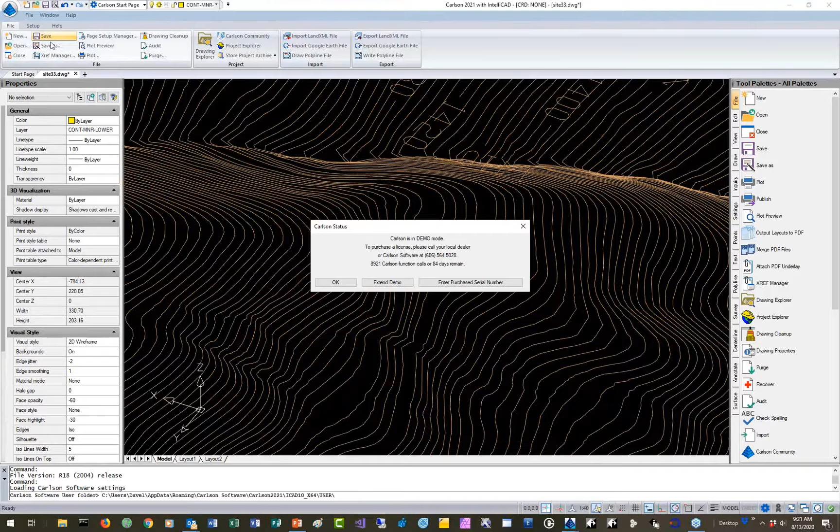I'm just going to open up a drawing file here. And what I want to start off with first is just kind of go through the user interface a little bit so you can see what this looks like and sort of compare it a little bit to AutoCAD.

One of the first things you'll notice when I bring this up is that with Carlson 2021, it has all of these Carlson solutions that are in here. So it has survey, civil, hydrology, GIS. So there's all these different solutions that Carlson actually has running on top of IntelliCAD.

But I just want to kind of cover the basics. So what I'm going to do is I'm just going to flip this over and just go to the basic Carlson menus, which is the typical kind of IntelliCAD menu system, so we can sort of look at the basics as a comparison to generic AutoCAD.

So let's take a look at the user interface here and you'll see. We have very similar things that you're used to seeing. You've got your app menu and you can look at some of the things that we can import, STL, IGES, DXF files, DGN, OBJs, different types of file formats that we can export. We have a lot of different things that we can attach.

If you're interested in attaching images, you may think, well, do they have enough image types there? We have a few image types that we support. I don't know how many that is.

We've got also the tools that you need for publishing your drawing files, drawing utilities like audit, recover, purge, overkill, and support for digital signatures, your typical options that you've got.

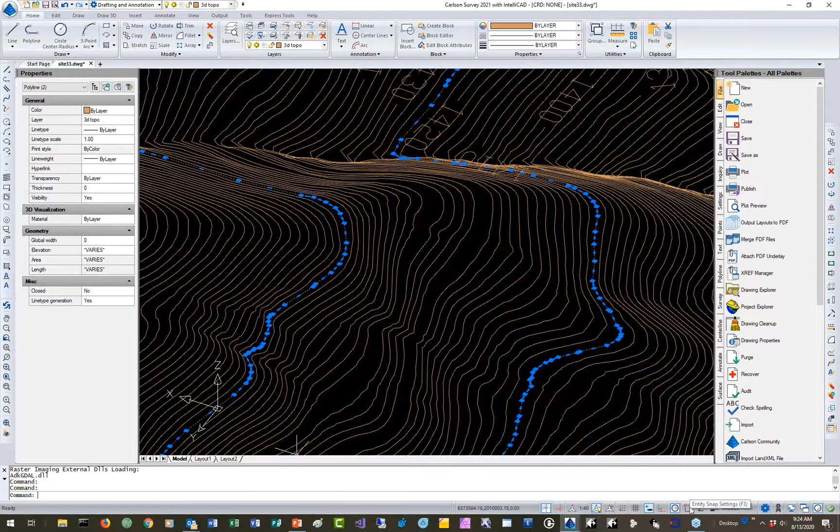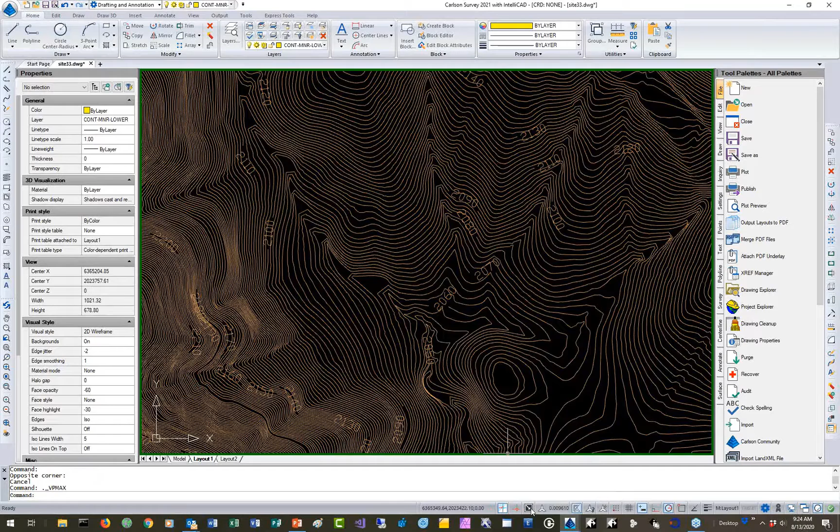And of course, if you're working with AutoCAD, you're working in paper space and model space, and you want to make sure that, oh gosh, does it support annotation scales? Got to have those. What about, can I maximize and minimize my viewport? Yeah, sure, no problem.

So pretty much the user interface is what you're going to get, is what you would see in AutoCAD. So you're wondering, well, what's the format for this user interface, and can I customize it? Yes, this is just a standard CUI file that you can customize like you can in AutoCAD.

We can bring up our CUI customization, and you can see all that. It's a little slow here because Carlson has so many different solutions and stuff in here that it brings up. But you can see in here where you can customize all these different areas of the product, the menus, the toolbar, the ribbon, the contextual ribbon states, quick access toolbar, shortcuts, aliases, double-click actions, what'll happen when you double-click on an entity.

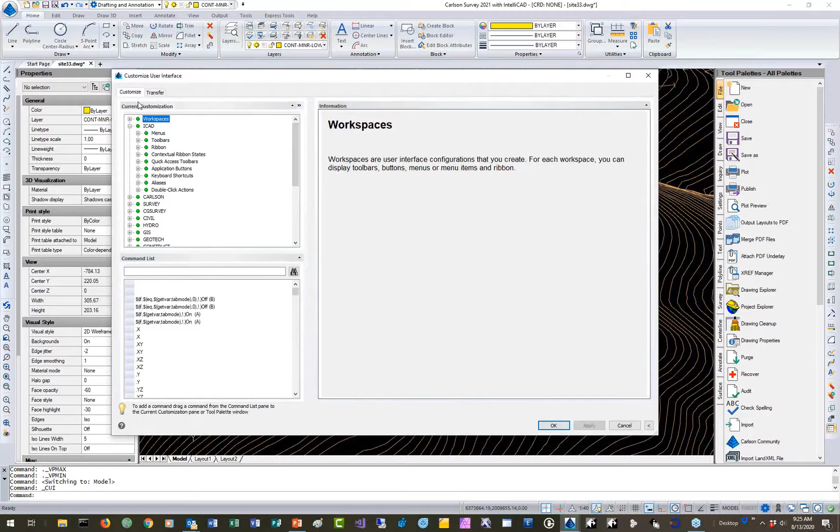It's all here. You can transfer stuff from other CUI files into IntelliCAD, or you can modify things here, and you can also merge things. There's a new merge feature now. I know some of you have used IntelliCAD before and had problems merging your CUI, maybe you've customized your older Carlson product and wanted to bring that in. You can do that.

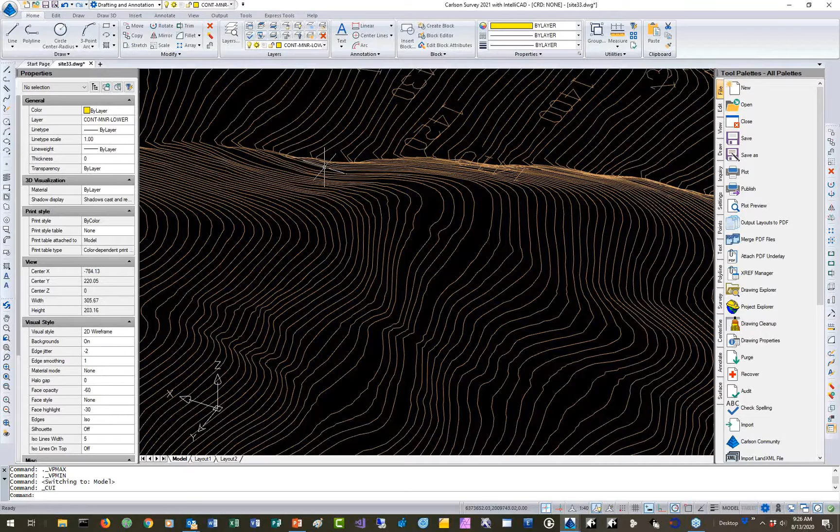I'm going to go back to the start page and bring up an empty file. I'm just going to scribble a little bit, not actually draw anything real, just to show you drawing some stuff in IntelliCAD.

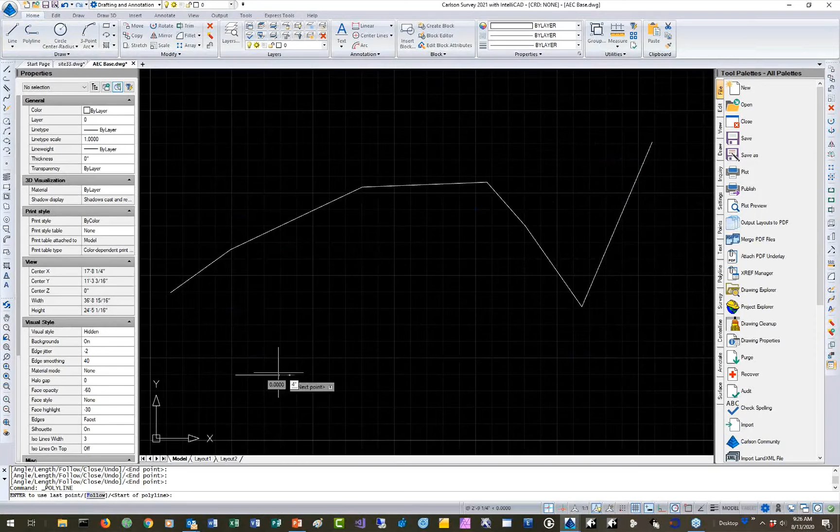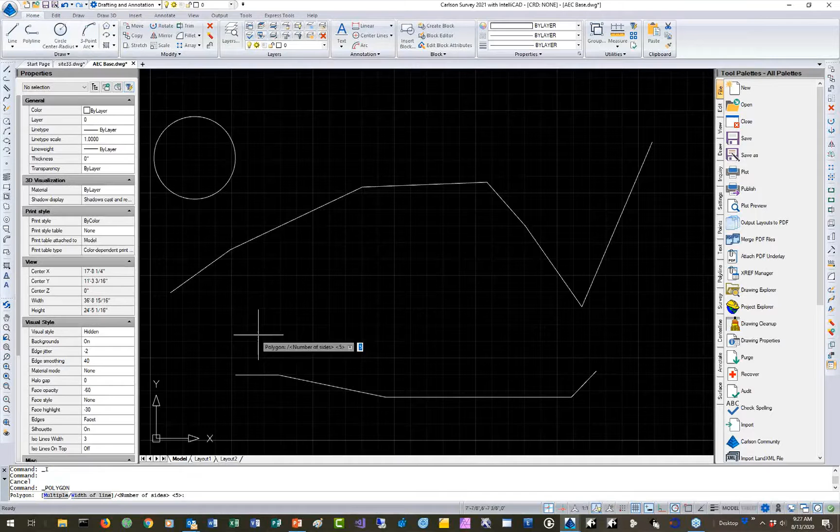This all looks familiar. You can see my dynamic input working here. I'm going to draw some lines and a polyline, and a circle. Let's do a polygon and make this 5 sides. Whoops, I just screwed that up. Let's try that again. Polygon, and our sides, I want 5. There we go, I just didn't pick my point. Now I'm going to draw something else.

Let's go in and show you a break line, because that's kind of cool.

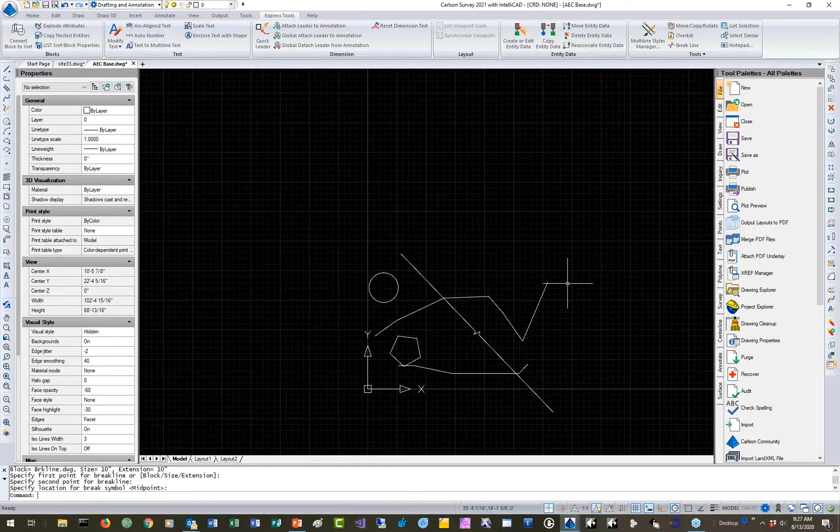So these are just standard AutoCAD entities. You can see from our draw menu we've got all these different types of entities you're familiar with, all the classic line, circle, arcs. I should maybe add some text too, so you've got something. You can see some M text go in. Just going to draw some text here. And something else that's kind of cool, the contextual menus. You can see we've got contextual menus for objects as well.

That looks familiar, but I wanted to show a couple things where IntelliCAD's a little bit different. For example, with this polygon, there are some additional grips. In AutoCAD, when you select a polygon, all you really get are these corner grips, and it's not really a polygon, it's just a closed polyline. Here it's a polyline just like in AutoCAD, but notice you have these additional properties. I can change the number of sides, I can change the inscribed radius or the circumscribed radius. It actually knows that this is an actual polygon.

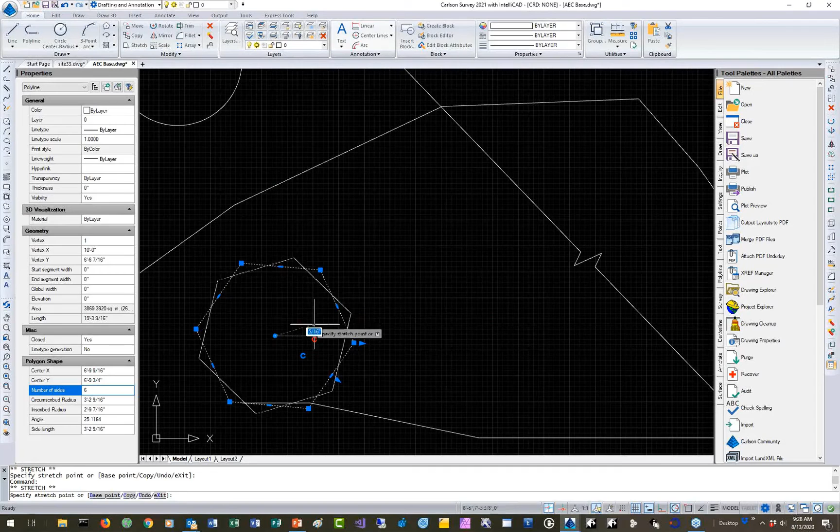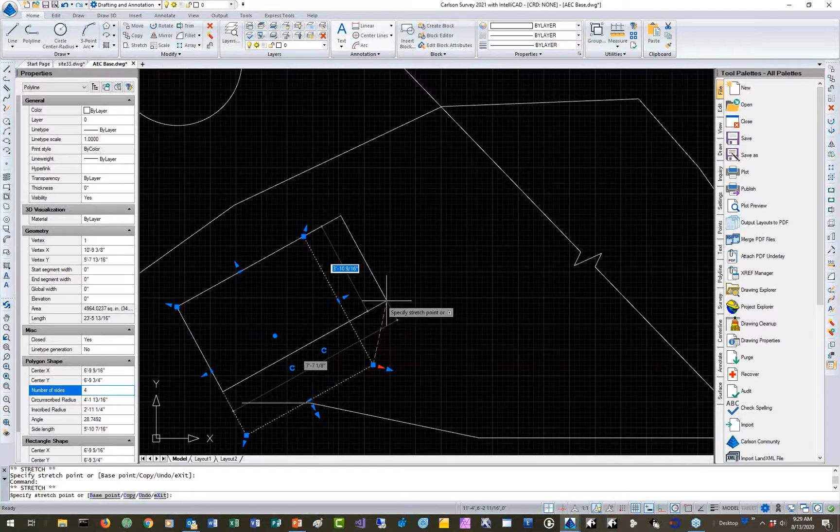Here I can stretch it using some additional grips that are available, and I can rotate it. It's just a bit smarter of a polygon. In fact, let's change this now to a square. So now we even have different grips. We have grips we can drag to keep this remaining a square, or if I take this one, I can turn it into a rectangle. It's just a little bit smarter than your average AutoCAD rectangle or polygon.

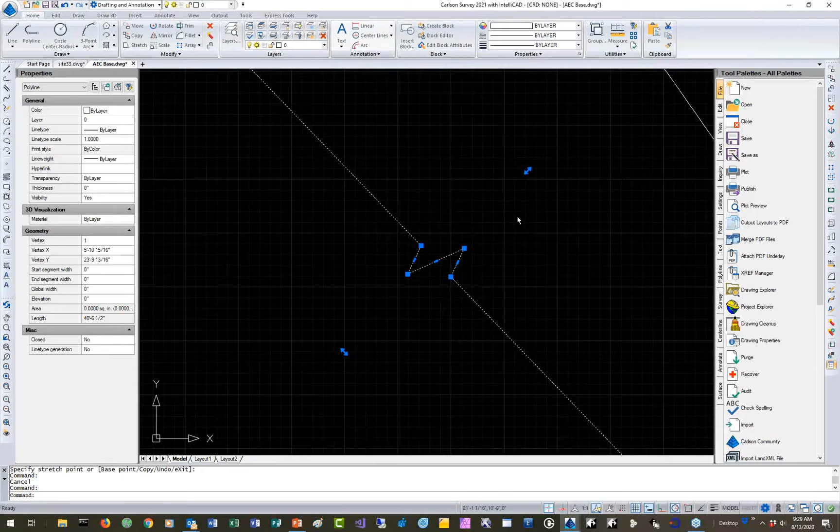I also want to show similar functionality with the break line, because if you ever draw with the AutoCAD break line, you know how dumb it is, and it always drives you crazy trying to make it work. But here with IntelliCAD, we have additional grips on this, and you'll notice it is really just a polyline, not a custom object or anything like that. Because of the way we draw it and look at it, we can actually tell what type of object it is, and so we can do some special things with it.

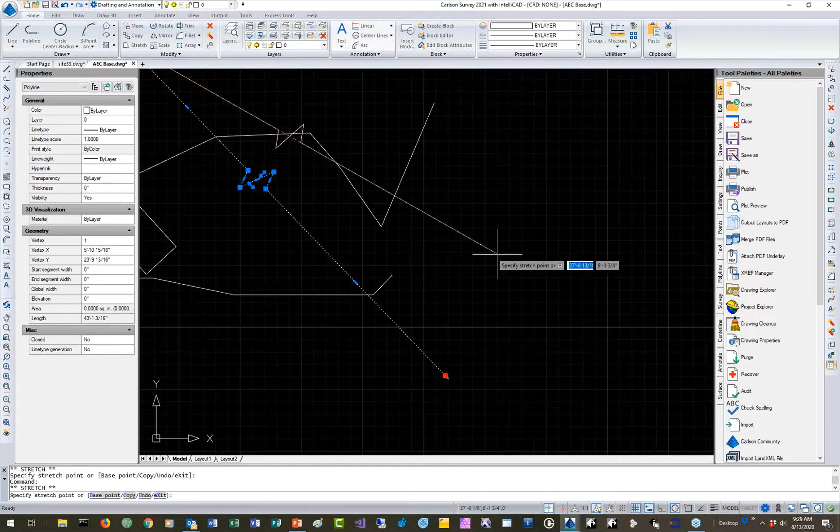Notice here, normally if you're in AutoCAD and you grab this, it doesn't rotate around like that. But notice here, if I use these other smart grips, I can get it to move the way that I want as a grip for the break line. But if I grab one of these other grip points individually, now I've just broken it. It's no longer a break line anymore, it is just a polyline. And if you had drawn this in AutoCAD, here's what that grip would do. See how it just comes off of the break line symbol and doesn't work right. This is what you would get out of AutoCAD if you had created your break line in AutoCAD.

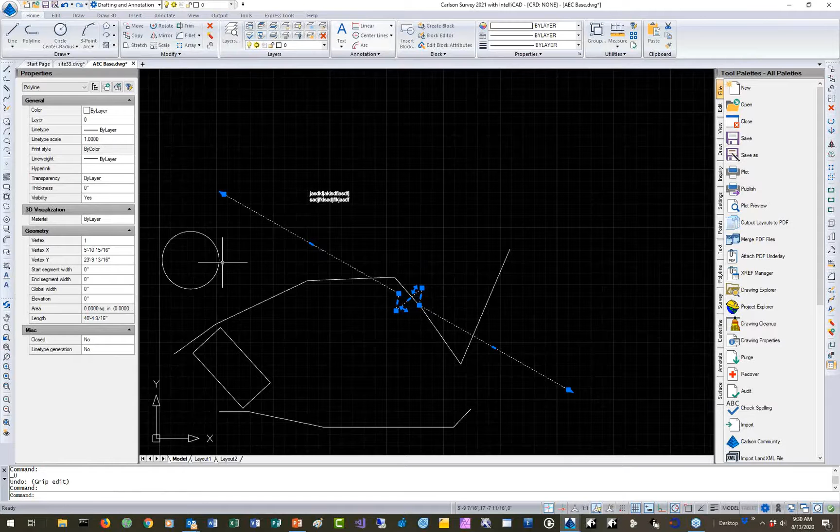So there are a few little things that we do that are, I think, a little bit different in IntelliCAD than what you would see in AutoCAD.

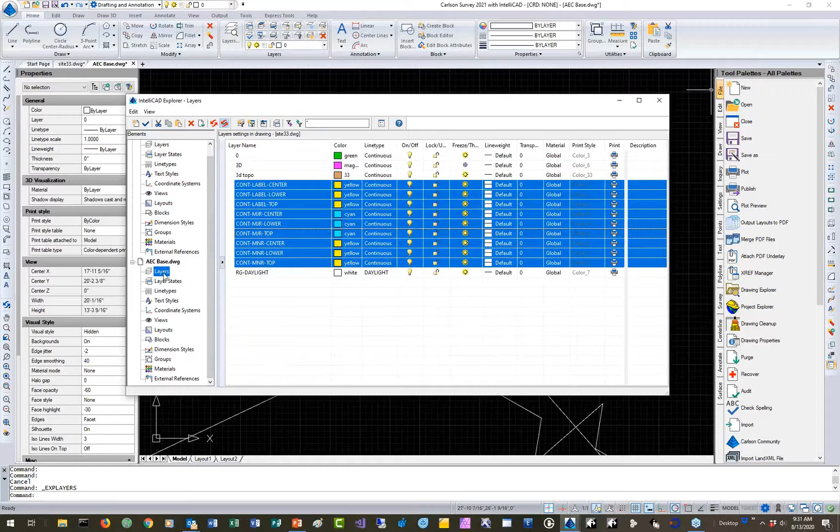Let's take a look at some of the other user interfaces. Here we have our Drawing Explorer that I've brought up, currently on the layers element. There's several different elements you can see here. This is kind of like the AutoCAD DesignCenter. We can have multiple drawing files here. I can go in and look at the different layers in this drawing file. I can copy those and bring them over into this drawing file, and paste them in here if I want to.

So those new layers are now copied over here. Very similar to AutoCAD as far as the user interface goes, because it's just a layer. It's data that's stored into the drawing file, but there's a few things that we do that I think are a little bit better.

Like, for example, materials. If you're working with materials in AutoCAD, you have to go through and use a different interface—there's like a material attach command that you have to use to attach a material to a layer. But here, it's just part of the Layer Explorer, so you can come in here and add materials right through it.

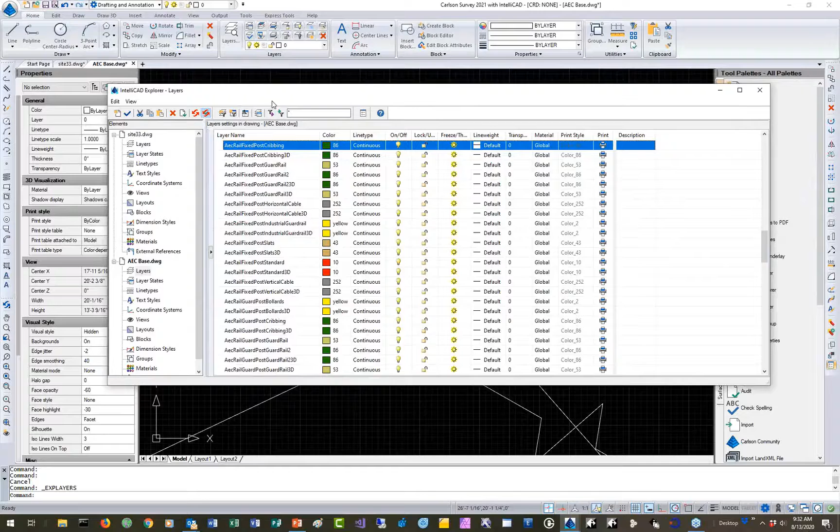So this is the Explorer, and the other thing is that this is a modeless dialog, so we can actually come out here and do other things while this is up.

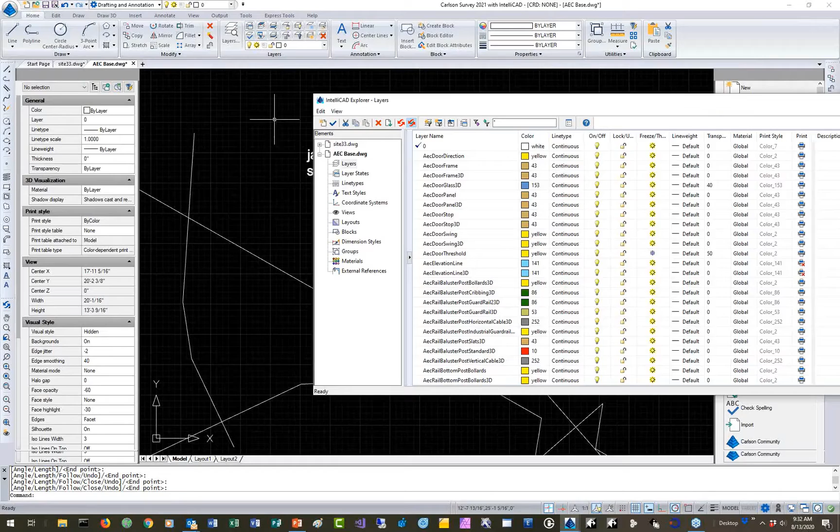But you may also want to dock it, so we've got a docking feature here. The docking is similar to what you're used to, so you can make it auto-hide if you want. I kind of like to leave it undocked, because I'll just throw it off onto a second monitor, so I can see it over there while working with IntelliCAD in the main area here.

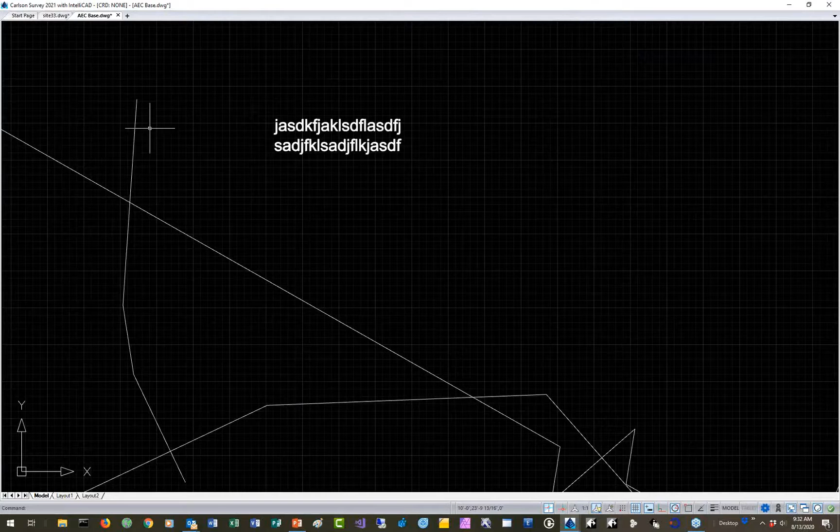But as you can see, things can get kind of cluttered, and your drawing area all of a sudden gets really small. So you might want to use something like clean screen, which removes everything while you work in your drawing area for a while, and then you can come back and restore everything back to the way it was. And bring that back so you have your full user interface that you want to see.

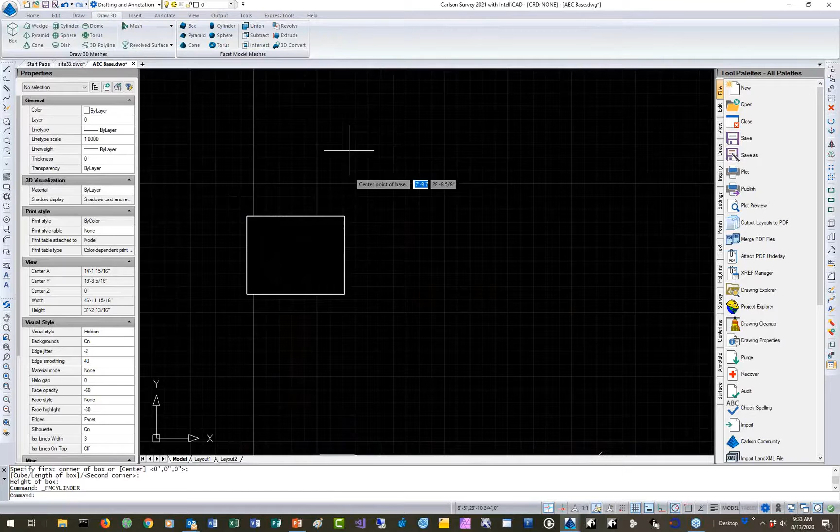Let's draw a few 3D objects and show a little bit about the new visual styles. So I'm just going to erase all this, and we'll just create some 3D objects. I'm just scribbling here, drawing stuff really quickly because we don't have a lot of time. Let's take a look at these.

So let's take a look at some of the new visual styles. I'm going to move this guy out a little bit so we can see him more clearly.

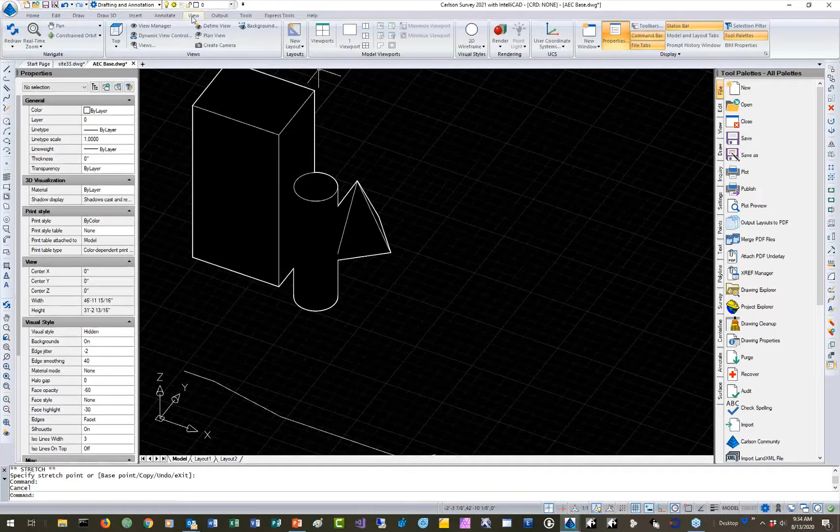So let's take a look at some of our visual styles. We've got conceptual, very similar to AutoCAD, but these are new for IntelliCAD—we haven't had support for some of these visual styles. Realistic, there's no materials assigned to this yet, so these all kind of look similar. Sketchy, we've got the X-ray mode. So there's several new visual styles here that are available, which is really kind of cool.

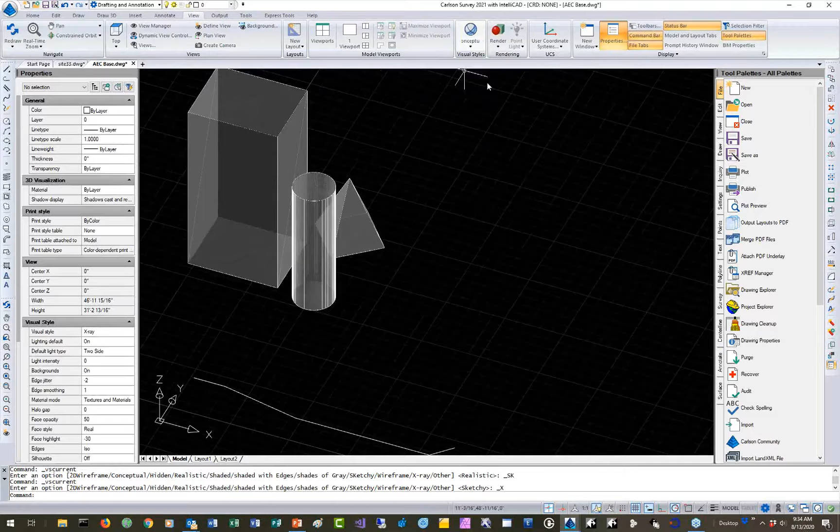And then also, we've made some improvements to how we handle views. The view manager now is modeless and dynamic, so as you're making changes in here, it's going to be reflected into the drawing file. You've got a little switch here for that, but this makes it so much easier to work with.

I'll show an example here, like perspective. It's got a nice little slider, so you can use the slider to sort of set your perspective mode rather than trying to enter a number in manually, which is really kind of awkward. So that's kind of a cool feature.

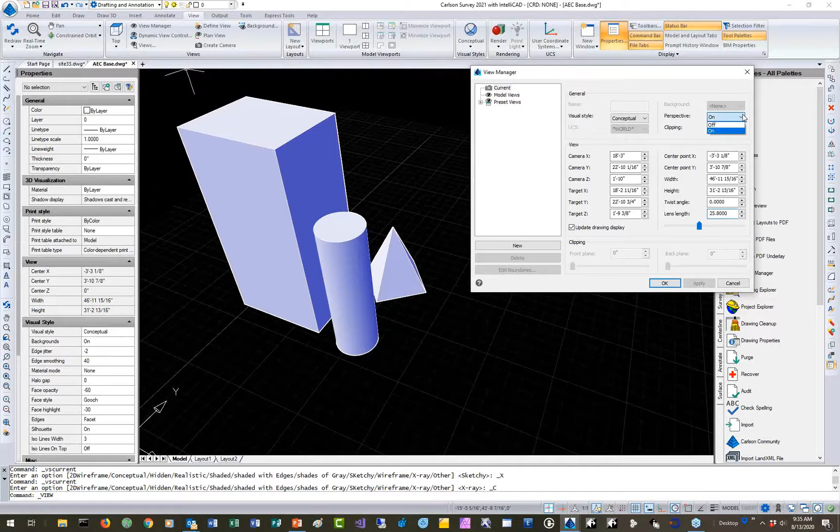But let's jump to a different drawing file to show some materials. I've got one that's sort of pre-started here.

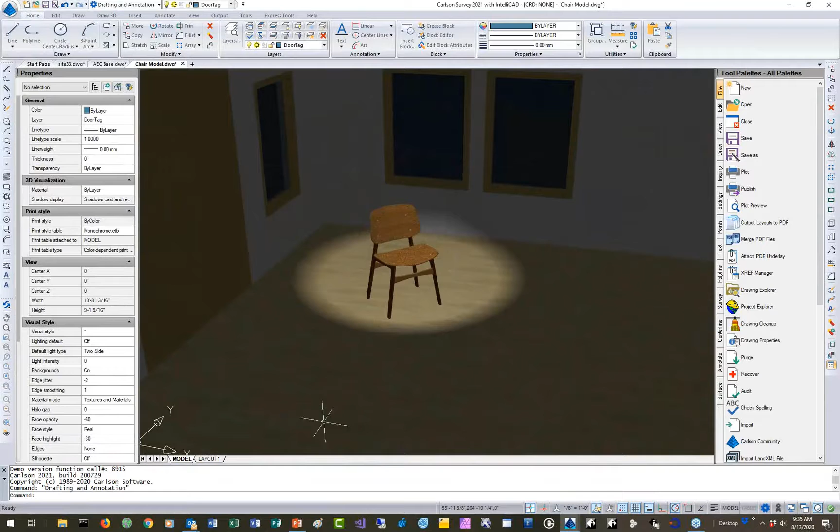So let's zoom out so we can see what we've got here. We just have some walls, doors, and windows, and kind of a placeholder floor. I've got a light here, and as you can see it has certain settings but no color assigned to it yet. And we just have a little chair that we've created here.

Let's go take a look and maybe change some materials here. I'm going to go over to my Drawing Explorer again, resize this so we can see everything at the same time, and check out some of the materials that I have.

You can see from the Materials Explorer that we already have a few materials in the drawing file, but I'm going to open this up and import a few more materials. I want to do some carpet, maybe a couple different colors of carpet here.

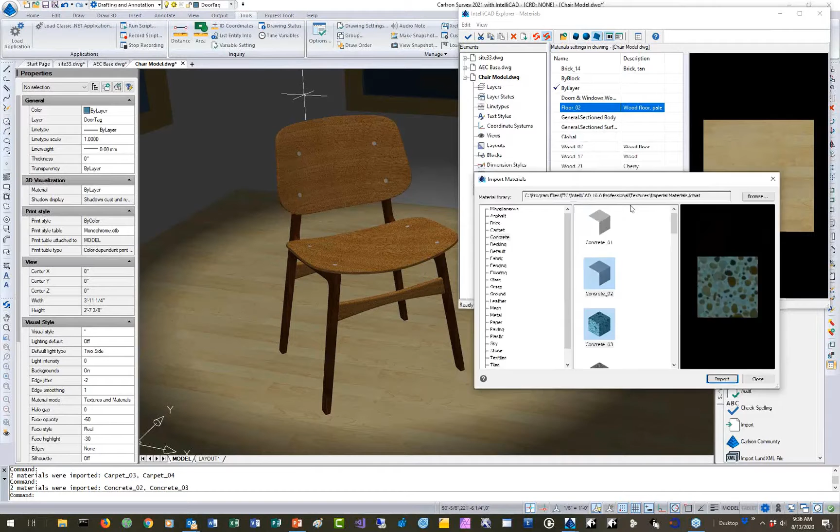Whoops, using the wrong button. What's it doing here? Did I get those in? Let's try that again. There we go, and I want to get some concrete in there too. Let's do a couple of these. I already have several different types of wood. Trying to think what other kinds of patterns I could put in - this will be enough for now.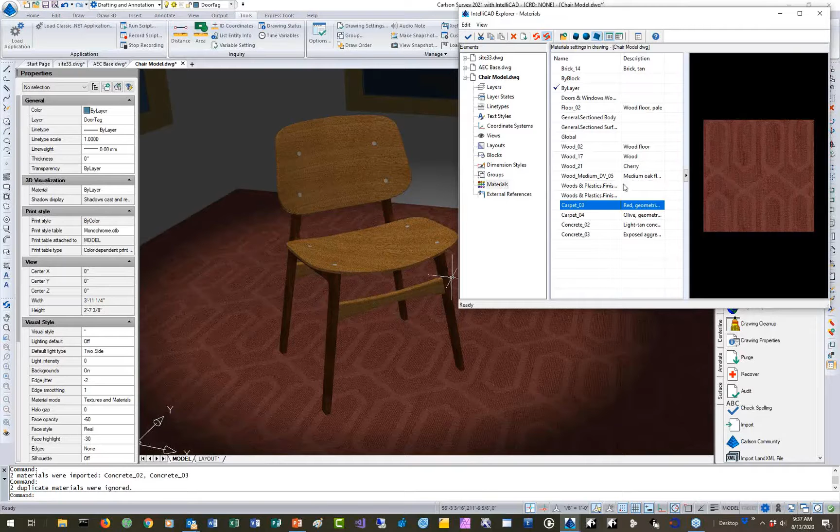So I'm just going to close this up, and now you can see from the Explorer I've got a few additional materials to work with. Like if I want to change this floor to carpet now, I could just drag it out and see a new thing there. And I can go, oh, I like this wood pattern I had - where was it? This floor pattern was kind of cool.

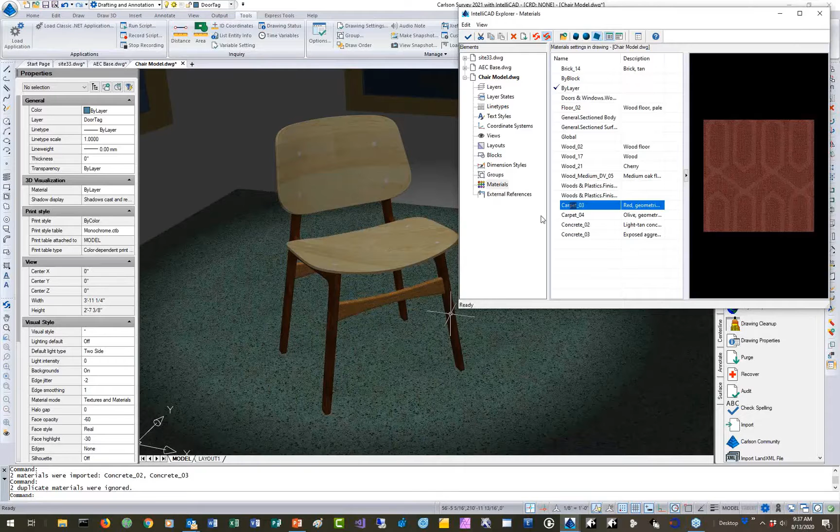What would it look like on the chair? I could just drag that over there and see what it's going to look like on the chair now and try it out. Maybe check out the concrete, or this weird concrete pattern that I put in to try out. So this is how the new materials work in IntelliCAD.

As I mentioned before, if you look at the layers, you can also assign materials by layer right in the layer dialog. Notice the list of layers available - I can select stuff and apply it to a whole layer. Or you can select the object and apply the material through the properties pane. So there's a variety of different ways to work with these materials.

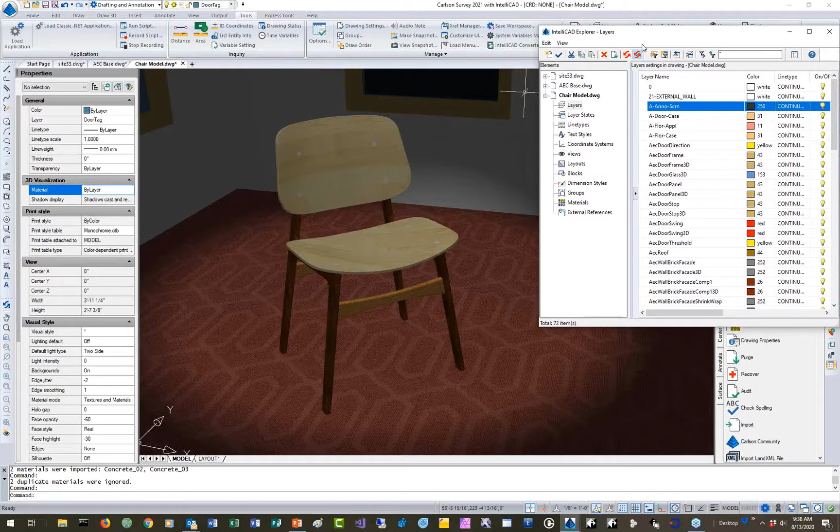The Material Explorer is pretty handy for drag and drop stuff, but typically I also like to work with layers a lot as well, because it's just easier to get everything on the same layer assigned a material. I find that's probably the most effective way to do it. But for demo purposes, the drag and drop looks really cool - in practicality, though, I like the layer method better.

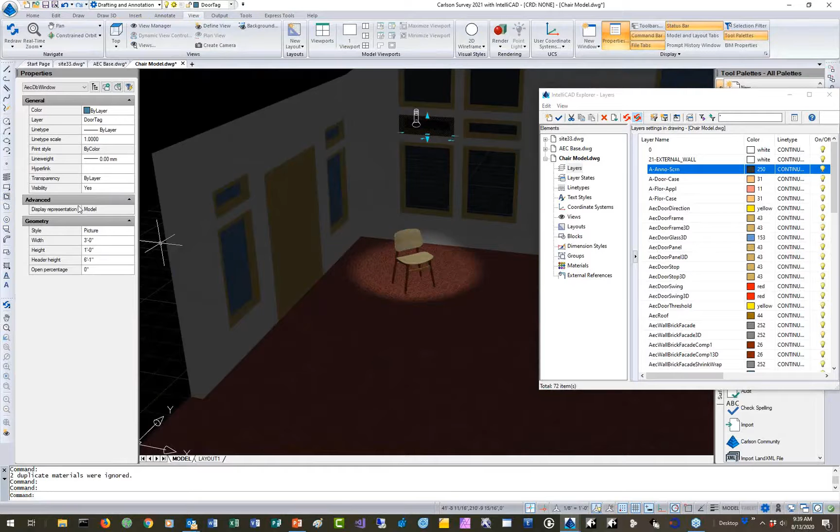Let's take a look at the light for just a second. We have - let's go over to our view - different types of lights and stuff that we can add as well. But I'm just going to come up here and edit this light, and let's go through. Oops, did I get it? I did not get the light.

There we go. You can see the cone shape from the light, and you can adjust that cone with your grips. Let's move this dialog out of the way so you can change that with your grips.

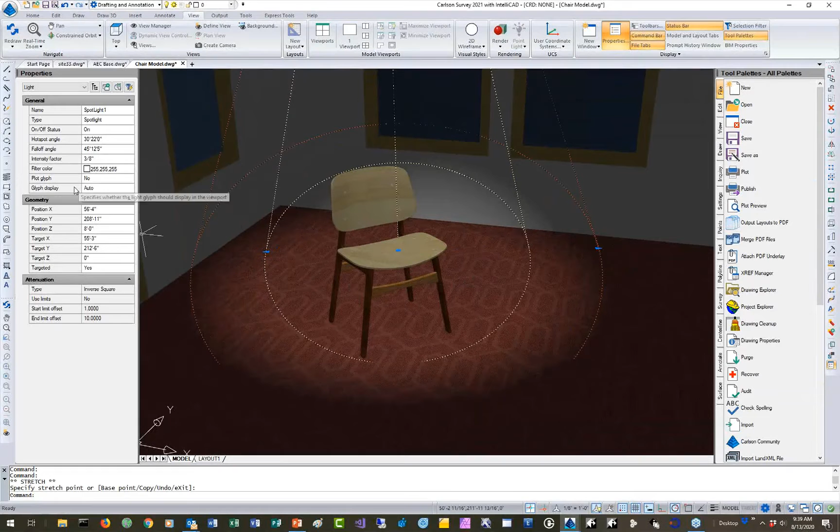You also have the light intensity, which you can adjust with the intensity factor, and you can change the color of your light. I'm going to make it red here, which is really ugly, but let's just change it to something warm instead. I should use something from the true color palette, but I'm going to be lazy and grab an index color instead - kind of a warm light. Maybe make that a little bit brighter.

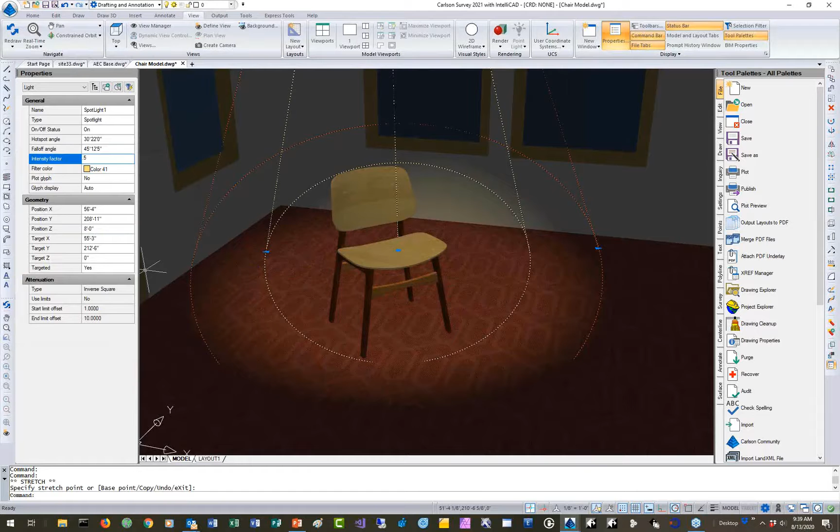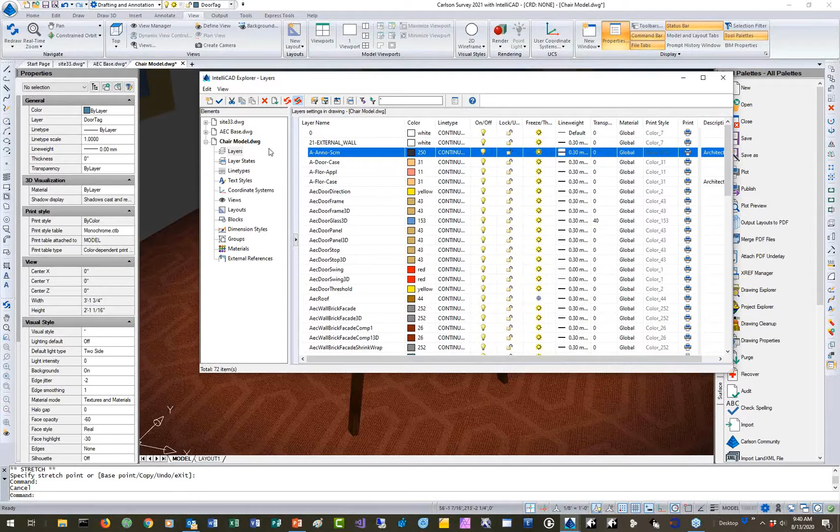So this is it - new materials, new rendering functionality, new visual styles in the IntelliCAD engine. We have quite a few materials available, but we don't have a material editor yet, so it's just kind of a static set. We will be working on a material editor for future releases. But we do have a pretty good set of materials available now, and it would be great to get feedback from users about additional materials or functionality that they need for this.

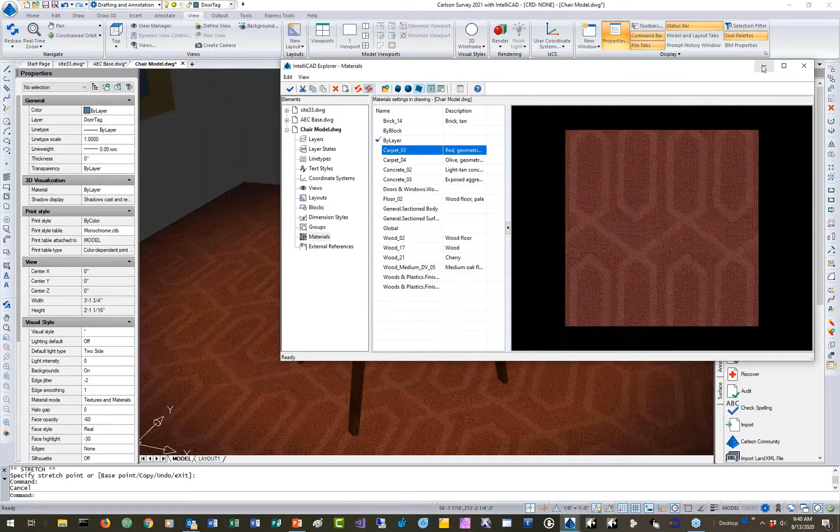Okay, let's jump to one of the other new areas. I'm going to flip back to this and let's just erase all this stuff, and we'll go to a plan view.

One of the areas that's new for IntelliCAD is we have IntelliCAD 10 some BIM functionality. BIM is building information modeling. I don't know how many of you need to work with BIM, but it's a classic situation where you've got a site plan you're working on, doing some survey work, because you need to clear an area for a new building. And how are you going to get that building in?

So here we have the ability to import like Revit models or IFC models. Let's go take a look at this. Let's see, where have I got this stuff? BIMSig, Revit demo. Let's do this technical school one. I'll just pick a point here anywhere.

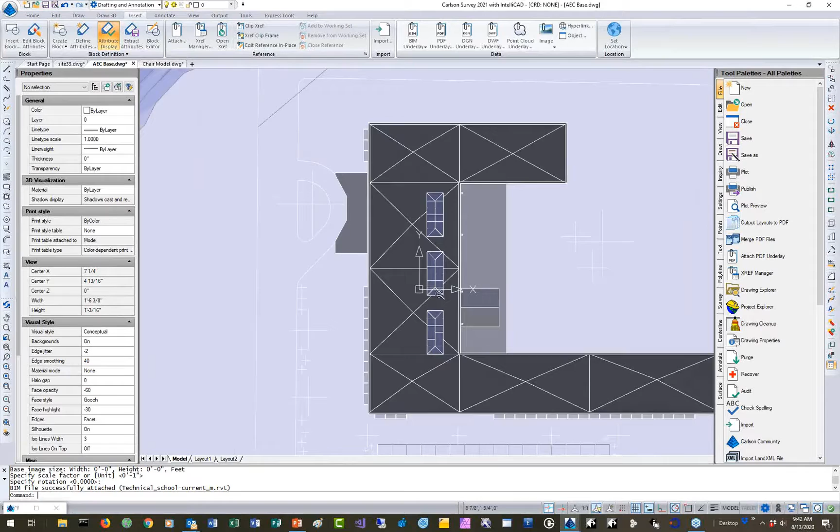We'll get that working. So yeah, it's a classic kind of scenario. You're working on a site, and you've got to clear space for where this new building is going in, and the architect says, well, yeah, I have a Revit file, and you're like, well, I have a DWG editor. How am I supposed to get a Revit file into a DWG editor, right? I can't do that. You can't do that with AutoCAD. They want you to buy Revit. So you can export DWG files from Revit. So here what we've just done is we just imported a Revit model into IntelliCAD.

So let's turn this visual style a little bit different here. Go back to my view. And let's just do the wireframe so you can see the complexity of this model. You see all the stairways, there's furniture in here, all the curtain walls, doors and windows and all that stuff.

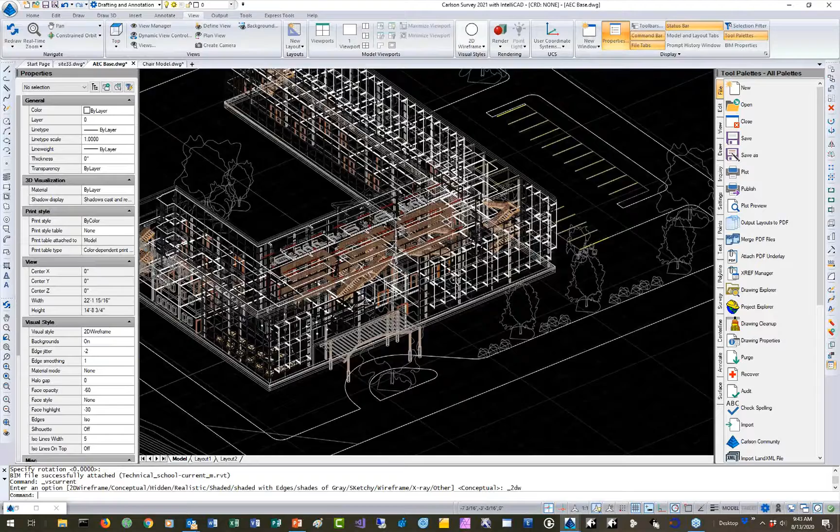This gives you the ability to bring these buildings in for doing your survey work, that way you don't have to depend upon the architect or whoever's working on the Revit file to actually send you the thing that you need. But like in this case, you look at the drawing and you think, oh, well, it's already got this stuff on it that the architect did some sort of civil work already. We don't want to see that.

So we can just go over to our trusty BIM properties pane here, and we can select this guy, and all of a sudden all these properties, these categories, hierarchies, there's all these different ways you can control visibility. There's not really layers in Revit, but there's other ways that you can control visibility. So we can come down here and say, oh, I don't want to see the parking, I don't want to see the plants, I don't want to see the topography. So we can just kind of turn those things off. So now all we see is the building, which is just what we want to see.

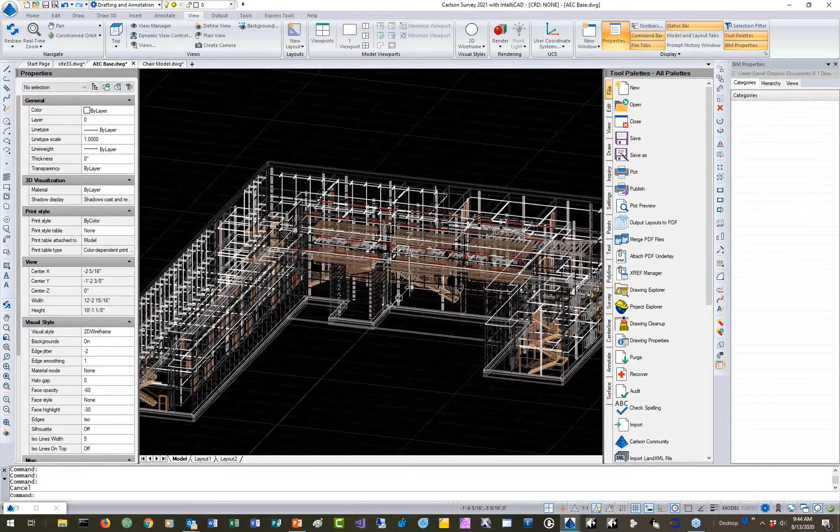And we can use that within our site survey work to actually make sure we get it set up to where the building is going to be located and parking and all that stuff. Now, let's go back. I'm just going to erase this and start over. Let's go back to plan view.

And what I want to show now is similar. We're going to go back and do another BIM import, or excuse me, a BIM underlay. But this time, you'll notice that it's not just Revit files, but it's also Revit family files, and it's also IFC files. IFC is Industry Foundation Classes, and it's from Building Smart. And Building Smart is, it's like an interoperable file format for AEC data.

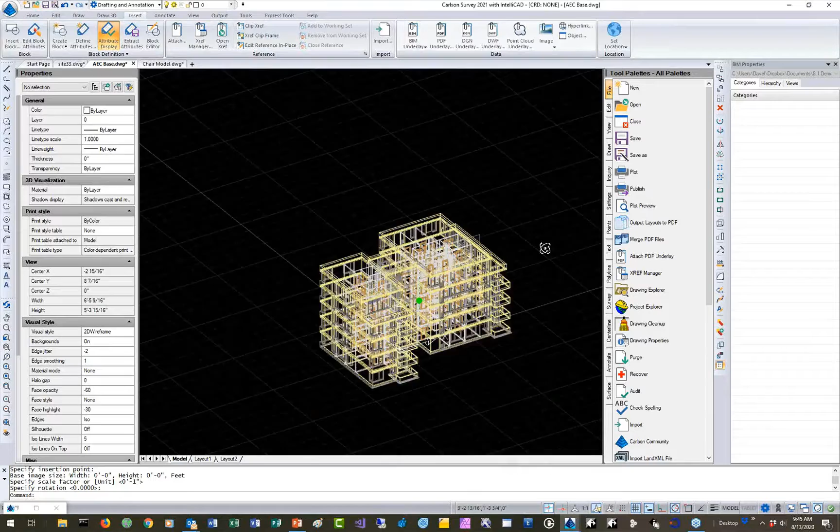So let's say your architect is working with something like Archicad or Tekla or some other architectural CAD application. Almost all of those CAD applications are going to have the ability to do an IFC export. And with IntelliCAD, you can also do an IFC underlay. So we'll go ahead and here, this is an IFC file now of a building. And we can display this. Let's go ahead and take a look at this from, we can do conceptual, is kind of cool, or realistic mode.

Now, the IFC model is a completely different file format than Revit. I mean, the results look similar because, you know, that's still architectural objects. But when I click on this and look at it in the BIM pane, I'm going to see different kinds of things than I might see with the Revit model. But I still have the ability here to control my layers and or my categories and things like that to turn things on and off with the BIM pane, even though they're different model types, different drawing types, different formats.

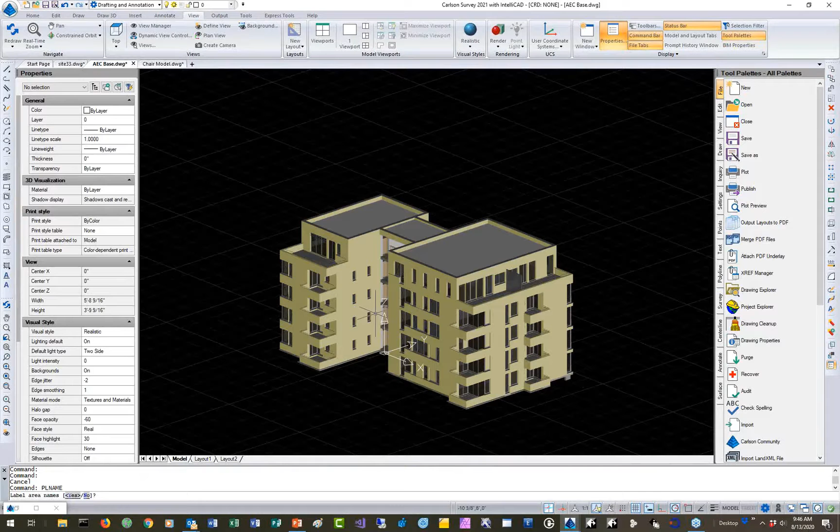Okay, let's take a look at when we talk about BIM stuff. I think it also would be good to, let me just go back to a plan view here. Whoops, wrong command.

I'm just typing stuff in here, and let's change this over to wireframe so we can see a little clearer what's going on here.

Now in IntelliCAD 10 we've included tools for creating AEC drawings directly, things like walls, doors, windows, stairs, railings, some steel, stuff like that. So if you need to play architect yourself, you can actually draw something. If you want to figure out if that new file cabinet you bought is going to fit in your office layout, you can lay out your office and see how it fits.

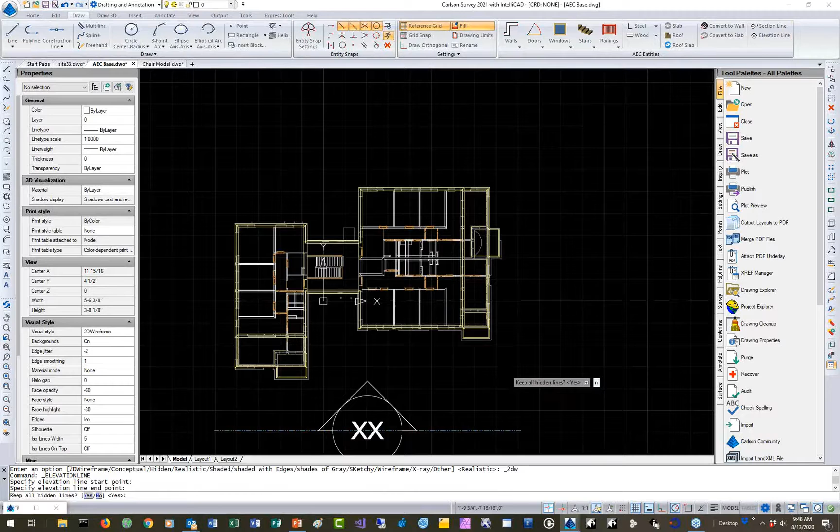Let's take a look at some of the tools for that. Now this is kind of unusual because these tools are for drawing new things, but you can also use them in conjunction with the IFC and Revit underlays. So I'm going to make an elevation of this building—well, my bubbles are too big, but that's just a dim scale problem. I'll say no here, and do an insertion point over here. So now it's actually creating an elevation from this 3D model for us. I use the elevation tool for drawing with these tools, and it also works for models imported from IFC and Revit.

Let's just do a section through here. Okay, so we just cut a section through there as well.

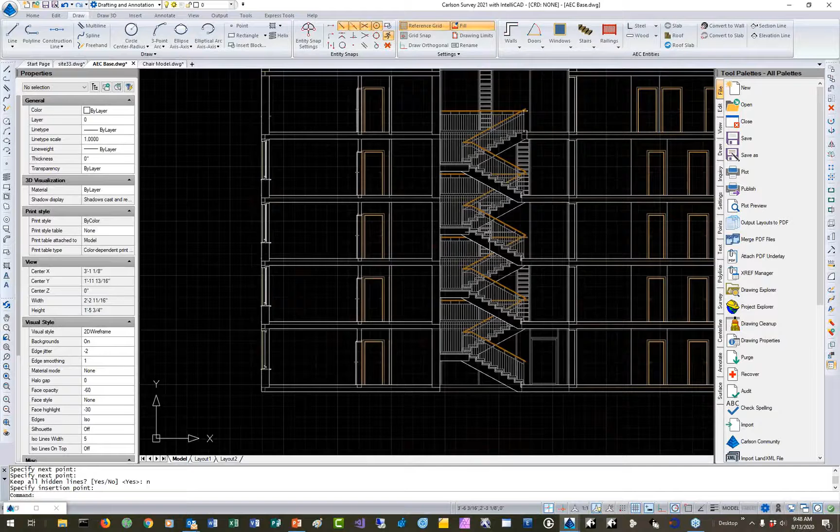So it's pretty cool what you can do with these. Now again, we can't edit this directly—it's like an underlay, right? But we can explode it, and when we explode this it'll become meshes and basic shapes. It loses all of its intelligence. So you'll be able to look at it and see that it's a window or whatever, but it's no longer an IFC object.

You can see now as I move into 3D that these are all flat 2D. And these are dynamic views. So if I come in here and change this view, let's say I shorten this up, it's going to update the view to just show that part that's been cut there. So this part's been cut off, so it updates the view to show that correctly.

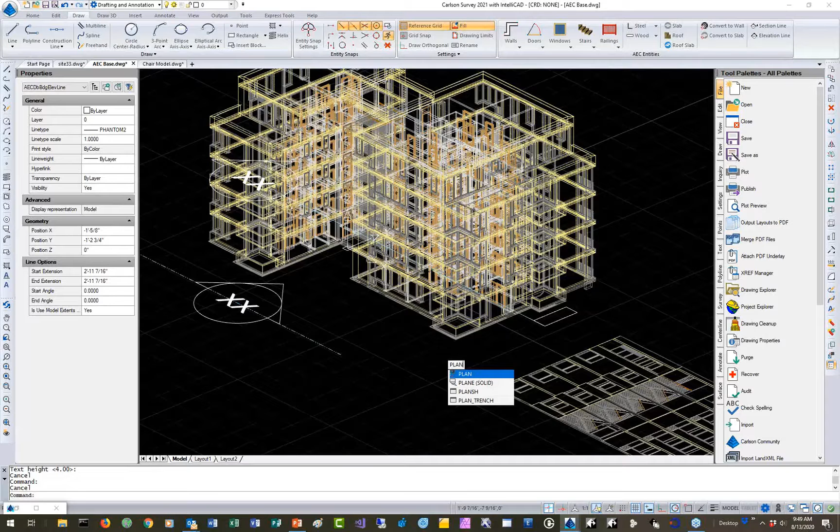Let's see, what else—let's go back to a plan view, and I keep getting the wrong command there. I still like to type stuff, like I said, I'm old school. Some things I type, some things I get from the menus.

Let's just erase this, and we'll do a little bit of scribbling. How are we doing for time? Not too bad. Let's see, I still want to show roofs and DGN and backgrounds. I still got a few things to show here. I'll try to keep it within an hour.

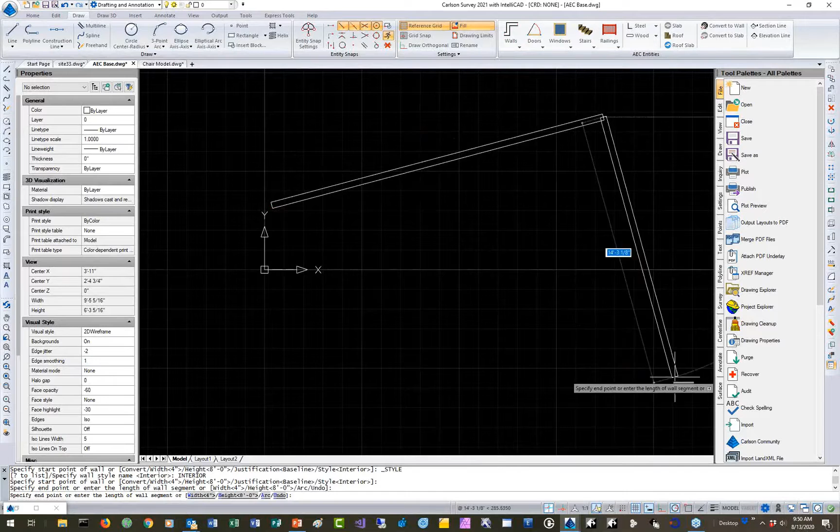So let's just scribble here a little bit again. I just want to show some of the AEC objects, kind of how they work. So I'm just going to draw some walls here. Notice as I'm drawing the walls, these are automatically doing the intersection cleanups.

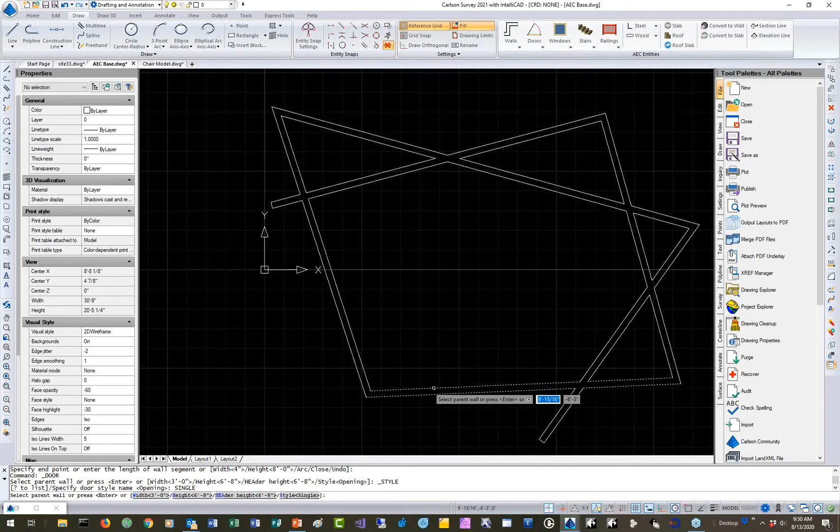Got a lot of different types of doors: single doors, double doors, uneven doors, bifold, revolving, overhead. Any type of door you can think of will be in here, and to add them you just grab it, select a wall, and plop it on there. Once the door is in, you have all your different types of grips that can control your swing, and you've got properties where you can set the width. So if I want to change that to 2'6", whatever, I can do that. I've got grips where I can grip and move it on the wall, I can stretch it on the wall, whatever—they're all there.

Same with windows—a lot of different types of windows: glider, single hung, awning, hopper, casement, pivot, curtain wall.

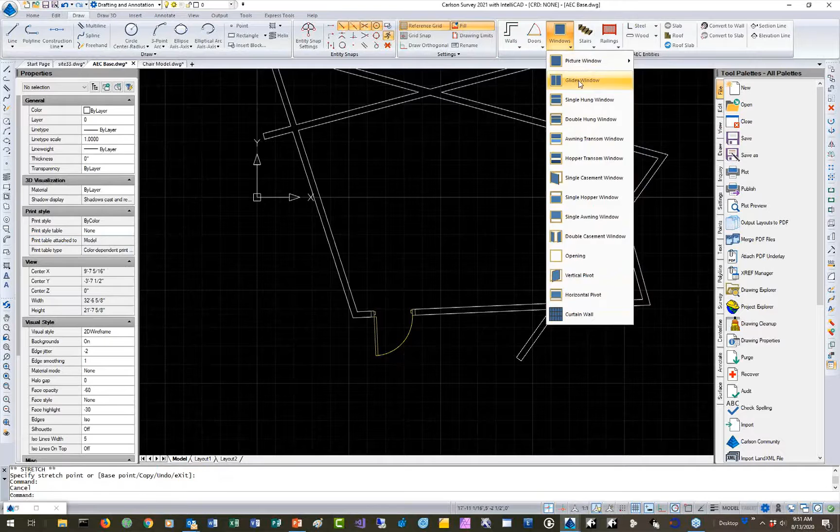There are different shaped windows. You just grab the window you want, select it on the wall, and place it where you want. It automatically gets placed, and as it goes in, it takes care of the wall cleanup. If you remove a door, for example, the wall gets healed, and if you undo that, the wall comes back.

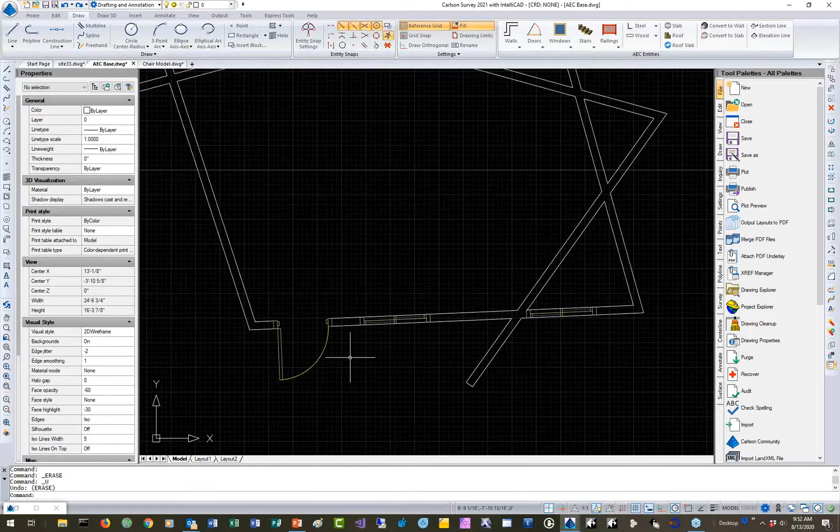If you look at this, you might think it's only 2D, but no, it's all in 3D as well. Let's go back to a plan view. Notice you have a nice clean plan view where you're not seeing the header lines for the doors, so you get a nice representation of what it should look like in 2D. Let's go on to some other object types.

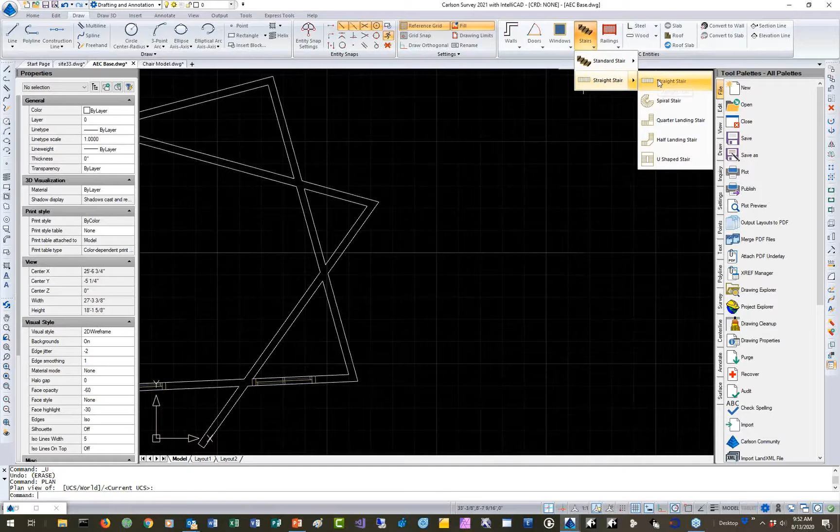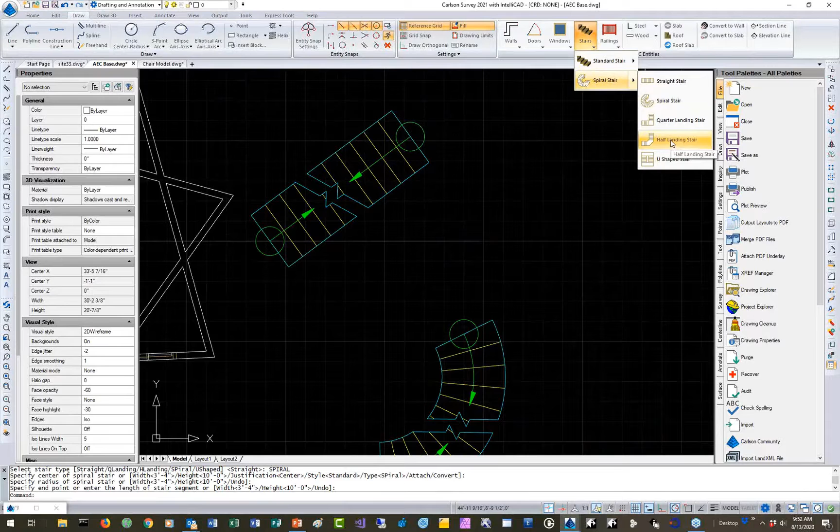Let's take a look at some stairs. Pretty tough to draw a stair, challenging here. We've got our spiral stair, which, if you had to try to draw this kind of thing yourself, would be a nightmare. You've also got your different types of landings that you can deal with.

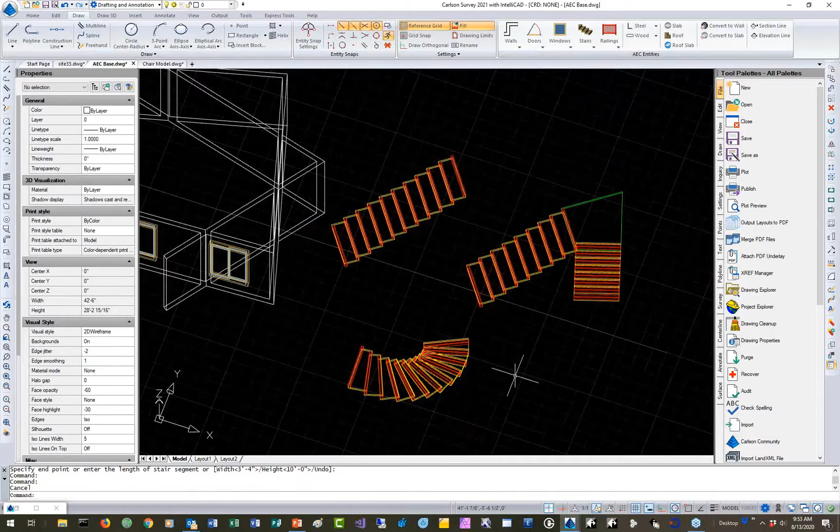Looks cool. When you select one of these, there's tons of properties that show up, allowing you to make a bunch of different changes in the properties panel for all these different types. Again, when you flip your view, these show up in 3D, so it's not only creating the 2D but the 3D version as well. But when you go to plan view, you get that nice 2D representation. So there's a variety of different types of stairs you can work with.

There are also different types of stair styles you can use in 3D, like wood housing, steel stairs, concrete ramps, different types of cantilever. So a variety of different stair styles.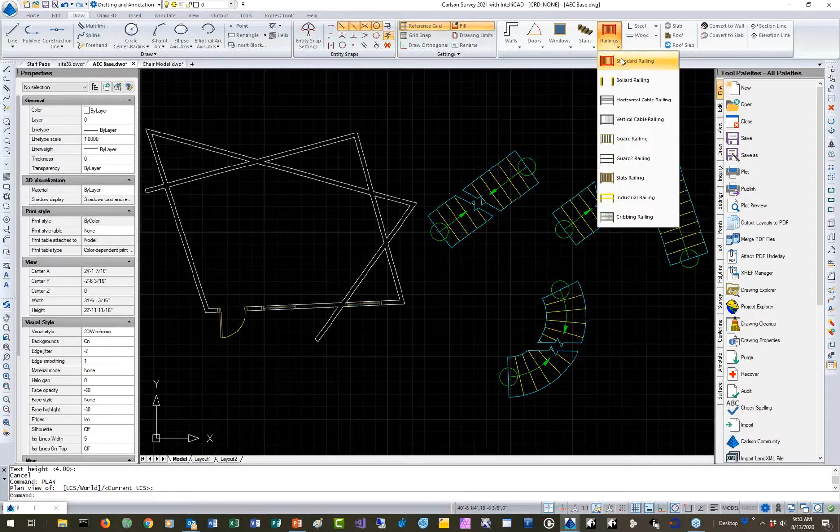Handrails, you actually have to draw these in 3D to really see what's going on. Let's tilt this up a bit more and grab one of these. You can see this goes real quick, it's a nice 3D handrail. Again, that'll convert to 2D for you as well. Look at that in a different style. For conceptual, let's go back to our 2D wireframe.

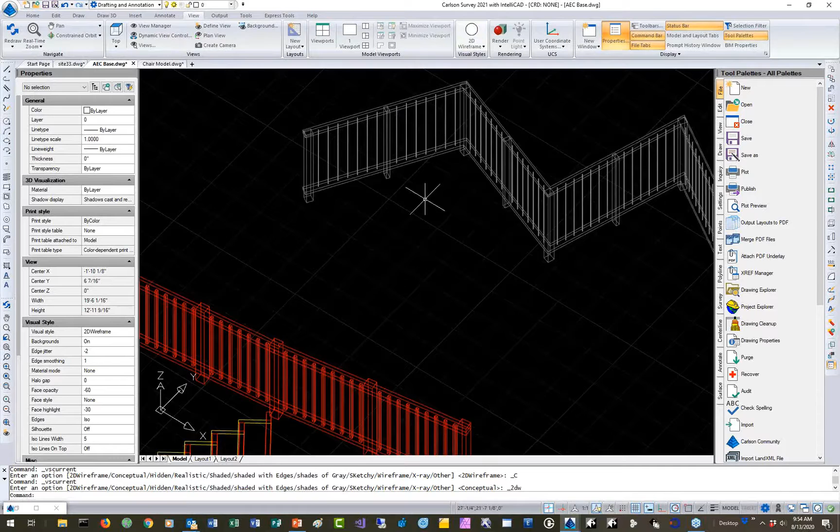You can also do some interesting things with these. If I create a polyline, I want to see this handrail, it's going to look something like that. Let's go back to our draw and do this as a guardrail. Oh, that's not a good example, let's try again.

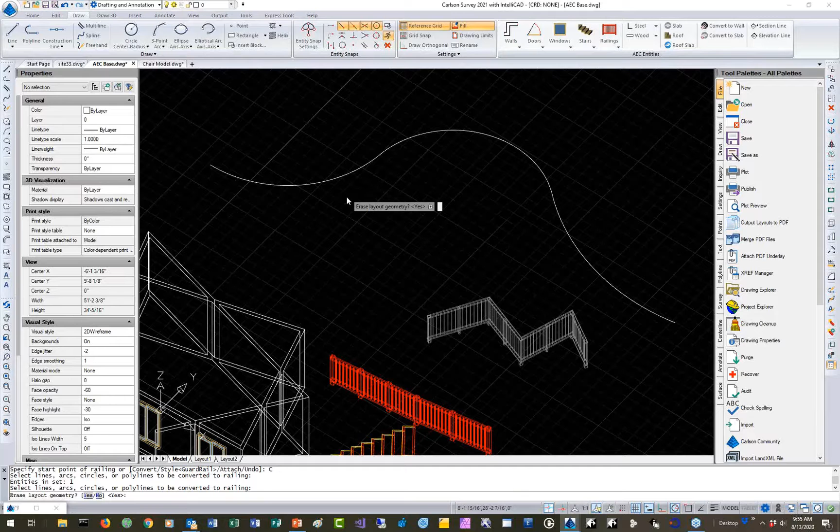Let's just use a guardrail, and down here I can say convert. Select my polyline and then go through the options: erase layout geometry, yes. Did I not hit return there? Return, there it goes, and it applies that handrail to the polyline.

You can also do this with walls. You can convert a polyline, even a curved polyline, into a curved wall. There's also curtain walls you can draw, which you can apply to a curve as well.

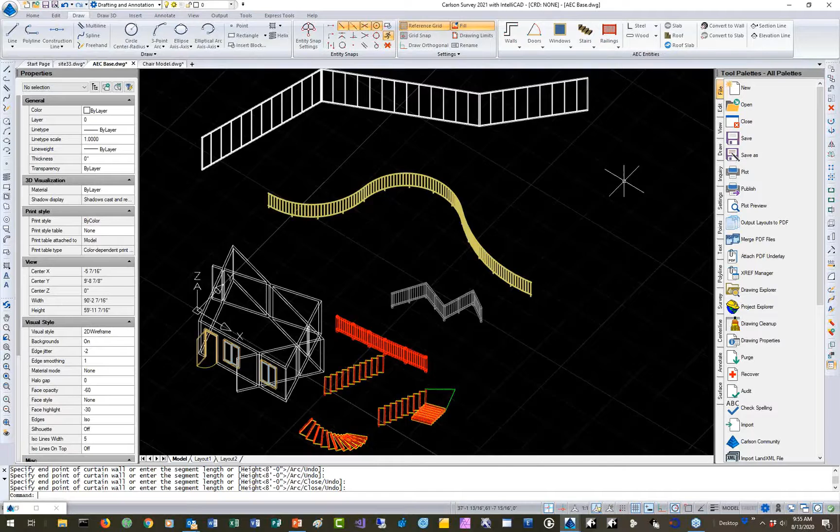What else? Let's take a look at the steel shapes, they're kind of cool. Every once in a while somebody has to do a little bit of detailing. One of the things I showed earlier with working with polygons, where you can stretch them around like a rectangle, rotate it, and do all the stuff with grips, makes life with detailing so much easier.

Here we've got a lot of different steel shapes, shown in metric or imperial sizes. We've got channels, angles, miscellaneous channels, tubing, S shapes, pipe, and these are pretty basic. You've got all the sizing and information here in this dialog, which is kind of helpful. You just double click on it, it drops your shape in there for you, and you can rotate it around, built to that specification.

Now these are actual custom objects, so they're a little bit smarter than your average polyline. If I come in and start to drag this, notice the tooltip on my cursor. This is dragging and changing it to match the data in the spreadsheet it came from, so it's not just making some random piece of steel, it's got to follow what's actually available to buy, dynamically changing to match the sizes that are available.

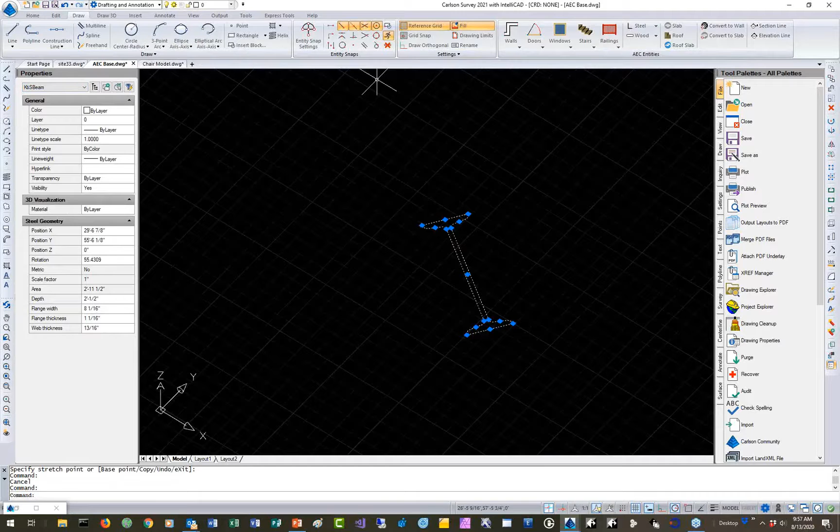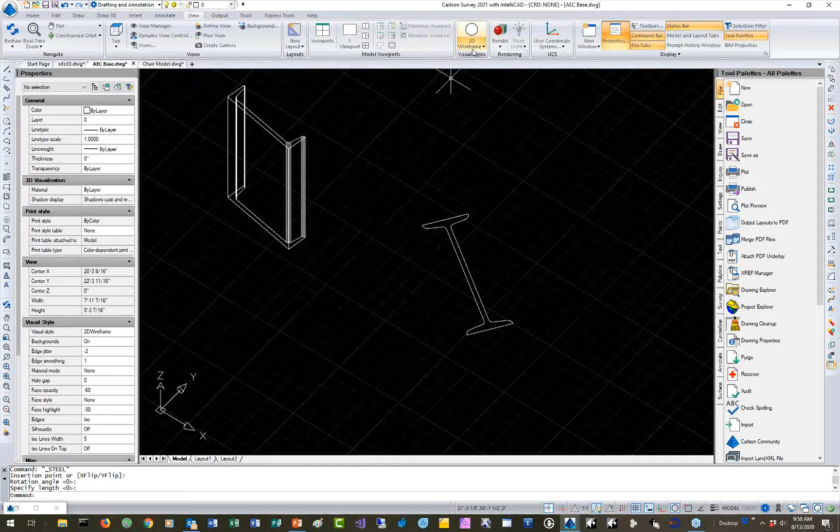You can draw these in 3D too, which I didn't show. Let's grab something a little bit bigger. So before I just did it in 2D, but I can make it in 3D as well. Let's change our view again and look at that in conceptual so you can see it.

And then there's also other little detailing shapes in there as well, some wood shapes, joists and things like that, and then some basic steel studs. We have some companies that we work with, like FrameCAD and others, that use these kinds of steel profiles quite a bit.

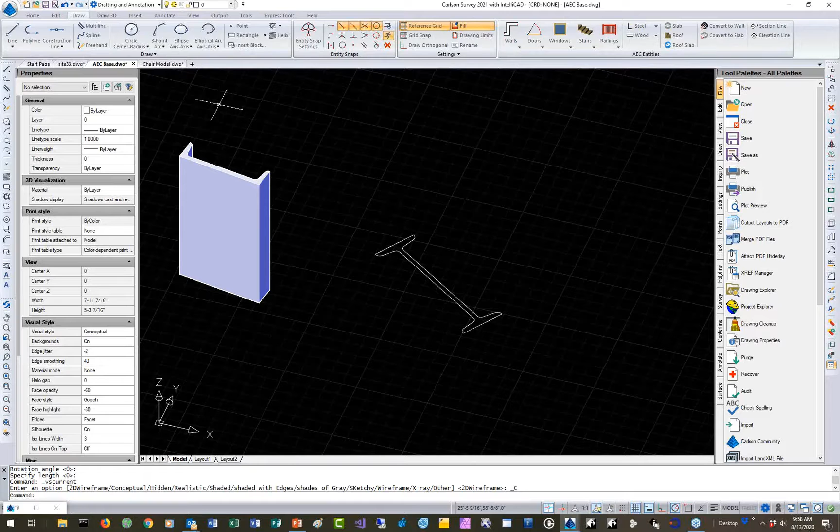How are we doing for time? Jennifer, can I go over a little bit? Hey, yeah, sorry, I had myself muted. We've still got everybody on. Looks like Lynn has answered a question or two.

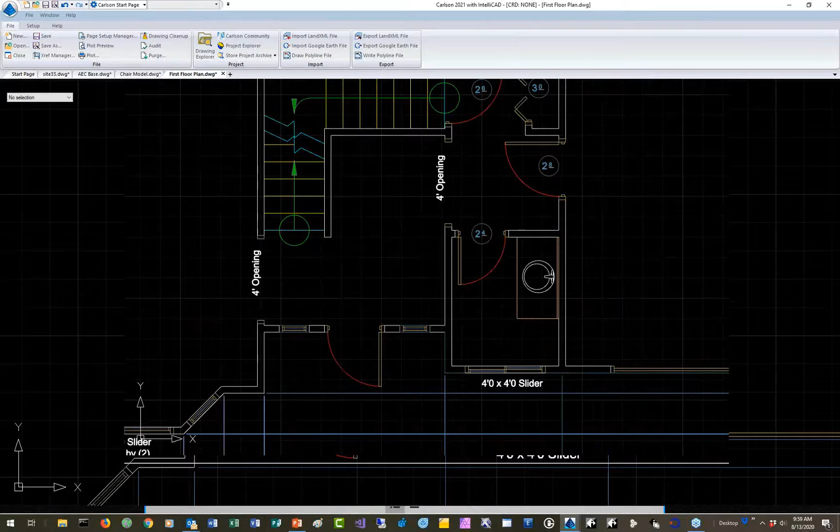Okay, I just wanted to draw a roof and maybe look at DGN. If you give me a couple more minutes, I've got a couple more things to show. Let's load up this floor plan. I just wanted to show the combination of, let me take a minute to bring this in. I'm going to erase this, and I'm going to erase this guy here too. I just wanted to show dynamic input with AEC objects, because it's really, really nice.

So here when I go to insert a door, I can quickly adjust this so I can see that door is now centered between the two walls. See how the dimensions are working with us here? I can quickly lay that in there.

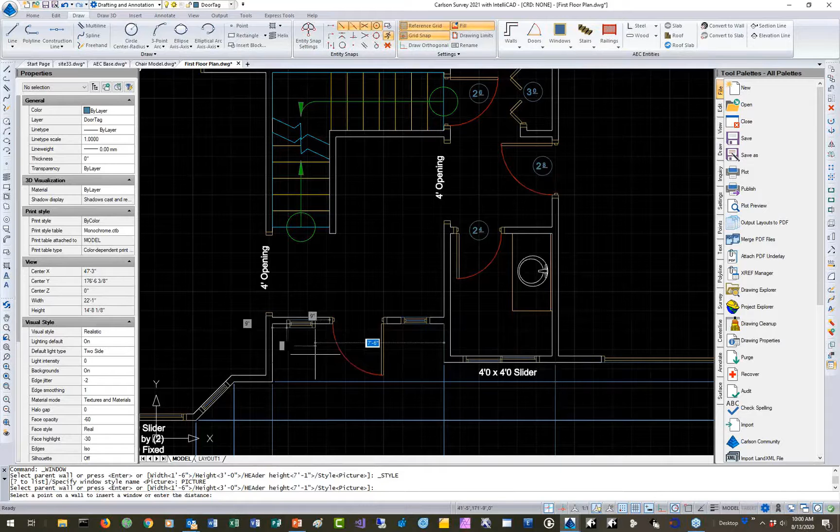And then when I go to put in a window, it's kind of easy here because that's just the length of the wall, right? I mean, that's simple, but now we've got a different situation where we've got the length from the wall, but also the distance from the door. So there's even more stuff involved that it's got to figure out with the dynamic input. AutoCAD doesn't do this - their dynamic input is just not this smart with these AEC objects, where you see all the correct dimensions you need to actually lay stuff in the way you want to.

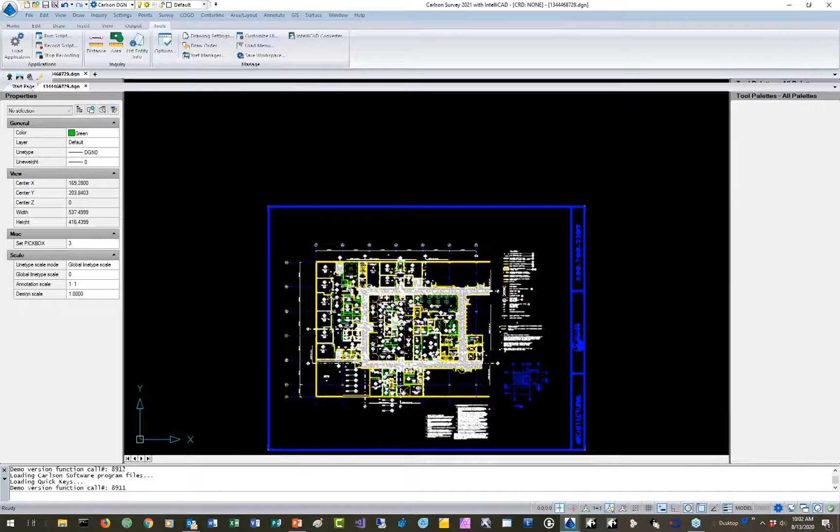Let's take a look, show real quickly. Let's see here, we've got - this is a little bit different. I'm going to open up a drawing file here, and there's something special that just happened that you probably didn't notice. We'll just zoom down in here real quick, and it looks just like any kind of drawing that you would normally see.

We've got some menus and stuff that came up, I'm going to turn off my menu bar there. And I can select things and do stuff. But what's different here is that this actually is a DGN file. This isn't a DWG file - this is a MicroStation DGN file that we just loaded in IntelliCAD as a native DGN file.

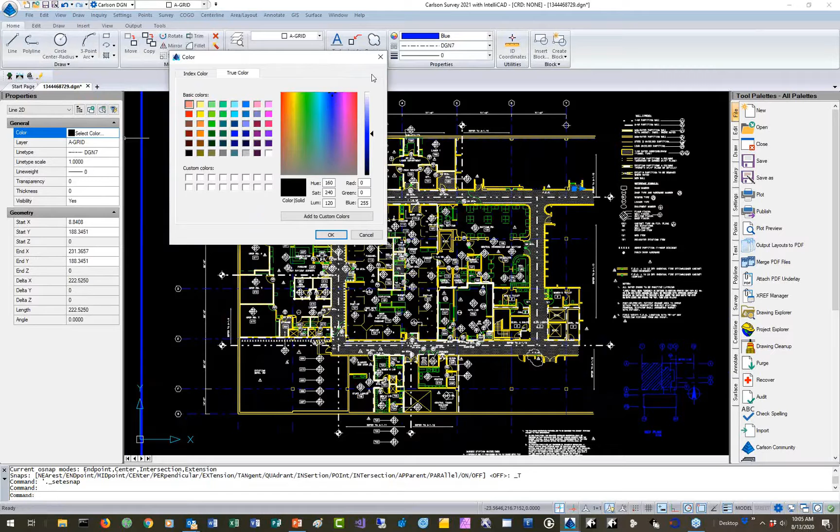Now there's a reduced tool set because not all of the features that we have actually work in DGN, and DGN files are different. We do have, like, the properties pane that shows up here, but for example, the DGN color palette is completely different than it is in DWG. So you're going to see some different things happen. Different types of entities are available in DGN than what you'd see in DWG, but for the most part, you're going to get the type of look and feel as if you were working on this in a DWG file.

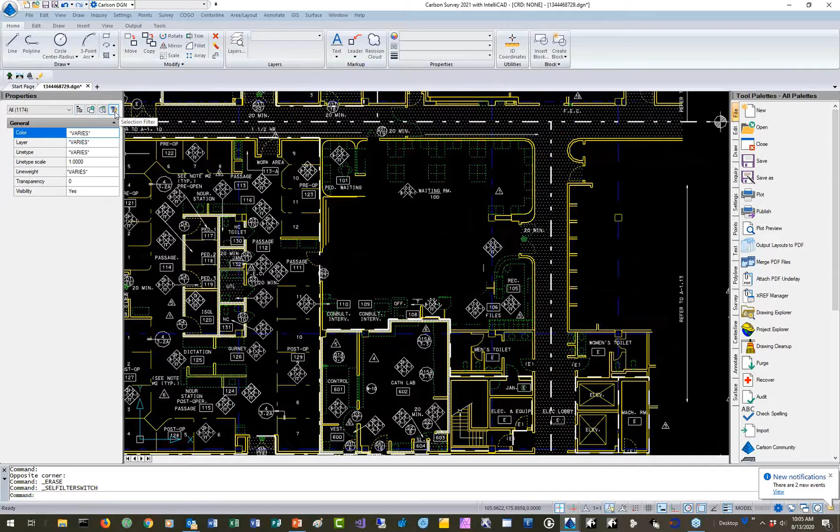There are some things DGN users will find interesting functionality in, like for example the selection filter. This is a big DGN feature that we've moved over to IntelliCAD. Notice here I can click on this and it's actually filtering out things by color, or I can filter things out by layer or object type, and I can pull these into the properties pane and make some changes there. So these are kind of DGN features you're seeing with the color palette, but this selection filter also works in the DWG version of IntelliCAD.